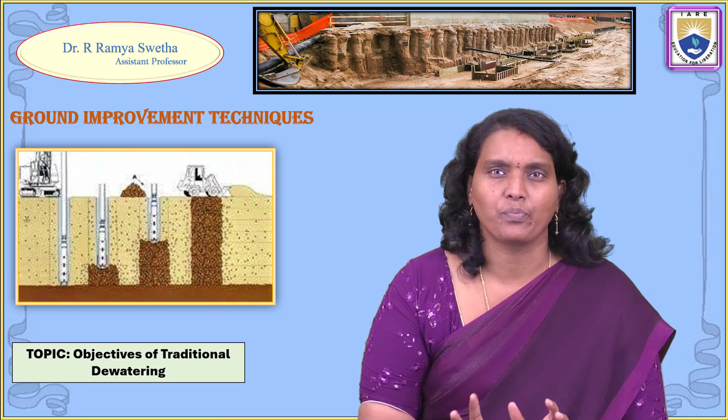Objectives of traditional dewatering. In this, we have to understand the various objectives involved in traditional dewatering. In dewatering, we stabilize excavation sites, improve soil bearing capacity, prevent flooding, facilitate construction, and carry out environmental remediation. These are the various objectives for dewatering.

Coming to stabilizing excavation sites: we remove the excess water to stabilize the soil and prevent cave-ins or collapse during excavation. Removing this excess water to stabilize the soil comes under stabilizing excavation sites. This is one of the objectives of dewatering.

And we all know how important soil bearing capacity is for any type of construction work we start. So before that, we have to understand the soil bearing capacity. Improving the soil bearing capacity means reducing the water content in soil to increase its load bearing capacity for foundations, for structures we construct below the ground level, and for other structures also. So improving soil bearing capacity is also one of the objectives of dewatering.

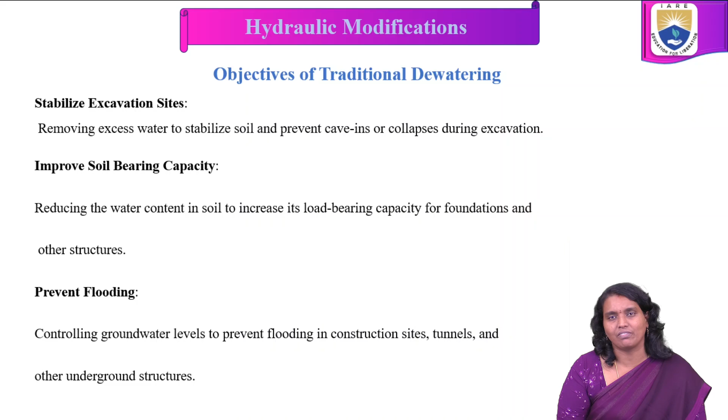It depends upon whether it is a tunnel or other underground structures. In some cases, flooding may need to be prevented above the structures also. It may involve low height bridges, and different scenarios may be considered. The main thing is we have to prevent flooding.

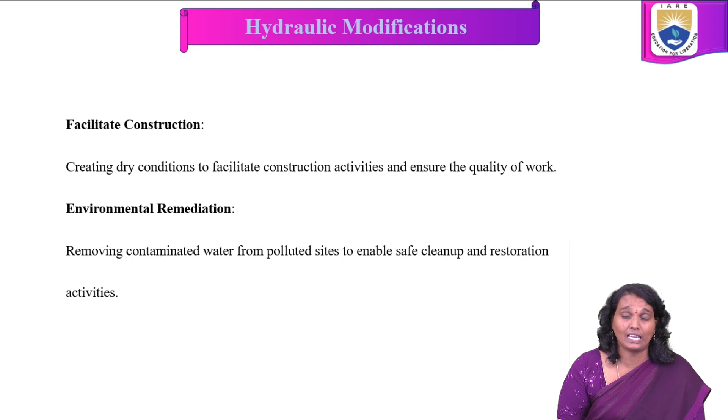The next one is facilitating construction. Here, activities are carried out under dry conditions to facilitate construction and ensure the quality of the work. And environmental remediation: removing contaminated water from polluted sites to enable safe cleanup and restoration activities. These are some of the objectives of dewatering.

Now, what are the various dewatering techniques? The first is sump pumping. In this method, we dig sumps or pits at the lowest points of the site and use pumps to remove water, such as reciprocating pumps. We remove the excess water in the sumps or pits from their lowest point using a pipe system. That is the sump pumping method.

Where do we use it, and what are the applications? If there are deep excavations, it is not adoptable. Sump pumping is suitable for shallow excavations and areas with low water table fluctuations. Whenever deep foundations are required, or the water level is very deep below ground level, sump pumping is not adaptable.

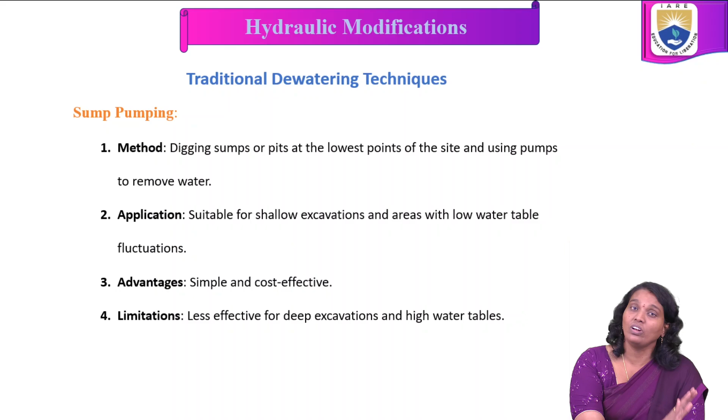Now, well point systems, another traditional dewatering system. In this, a series of small diameter wells is installed and connected to a header pipe and pump to lower the groundwater level.

In this application, it is also effective for shallow to moderate depths and sandy soils. In this, the soil condition also we have to understand. The well point system is suitable for sandy soils and it is effective for shallow to moderate depths. So the previous sump pumping is only for shallow. This is for shallow to moderate depths.

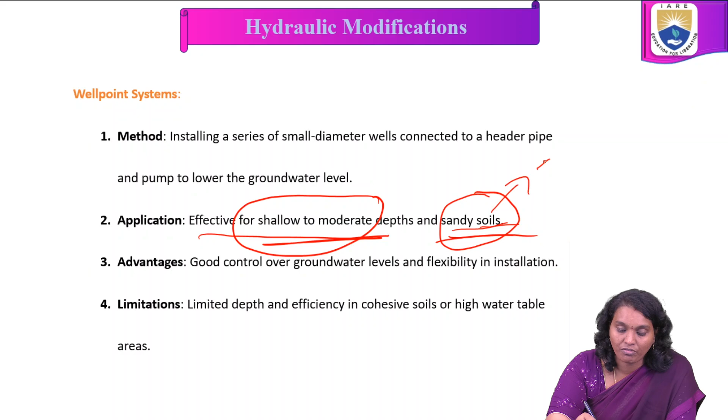It is also not suitable for deep depths, and the type of the soil is also important in these well point systems. Only in sandy soil conditions are we going to apply well point systems. Coming to the advantages, it gives good control over the groundwater levels and flexibility in installation. The installation process is very flexible in this well point system.

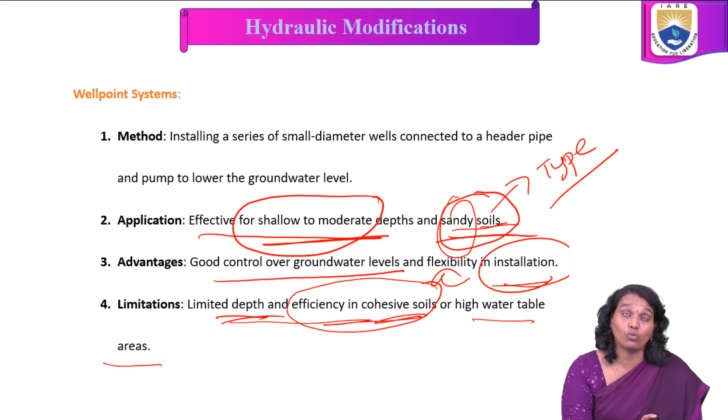And coming to the limitations, limited depth and efficiency in cohesive soils or high water table areas. So from the efficiency point of view in cohesive soils, it is limited, as well as in deep depths. It is not at all an adaptive traditional technique there. It is adaptive when effective for shallow to moderate depths and sandy soil conditions.

Next one is the deep wells. So drilling deep wells with submersible pumps to remove water from greater depths. In such cases we are using these deep wells. This is suitable for deep excavation and high groundwater levels. The advantage is it is effective for deep water table control and large volumes of water. Whenever large volumes of water are there and the depth is also more, in those scenarios we are using deep wells.

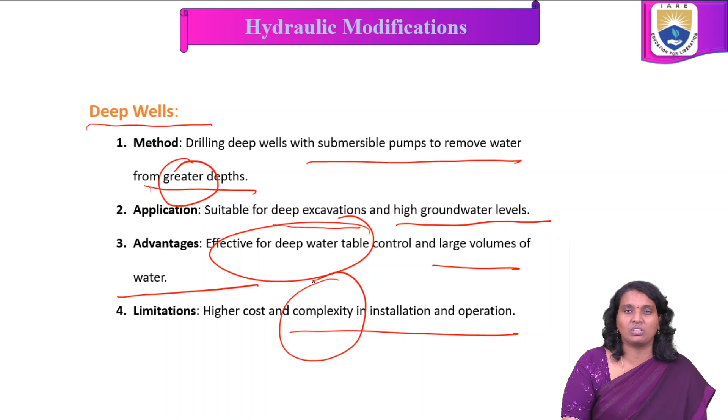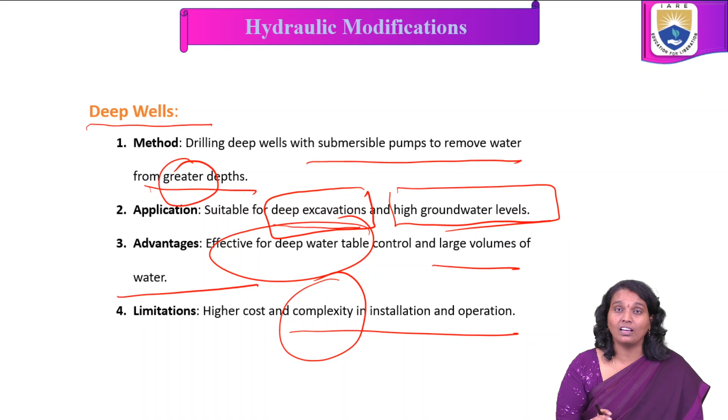Coming to the limitations, higher cost and complexity in installation and operation. It is very costly. It is also eligible and adaptive for shallow and moderate depths, but the cost is more. So whenever it is required, we have to adopt it, that is enough. And at the time of installation there is so much complexity, and also in its operation. So these are the deep wells, which are suitable for deep excavation and high groundwater level conditions, removing water from great depths.

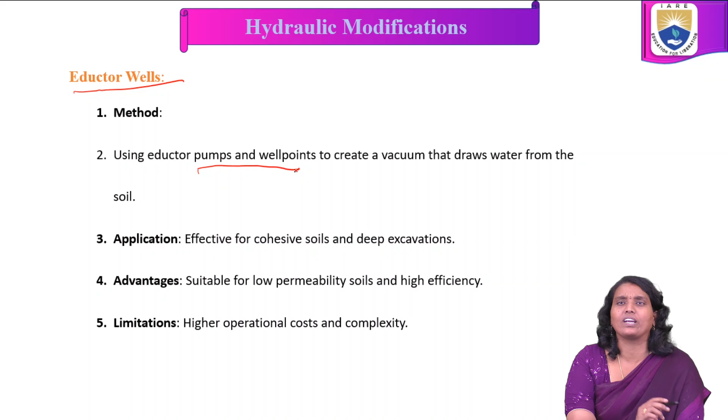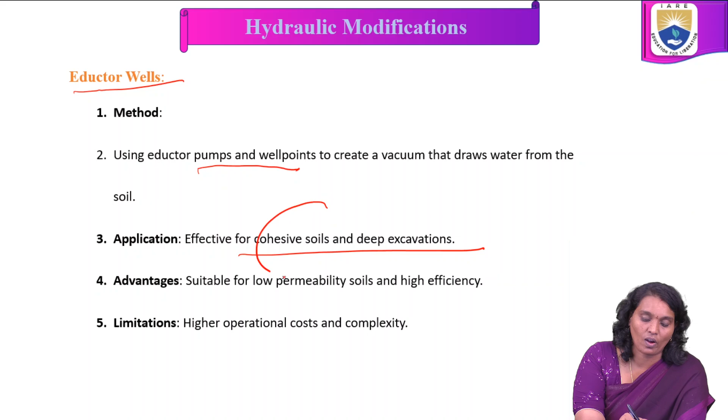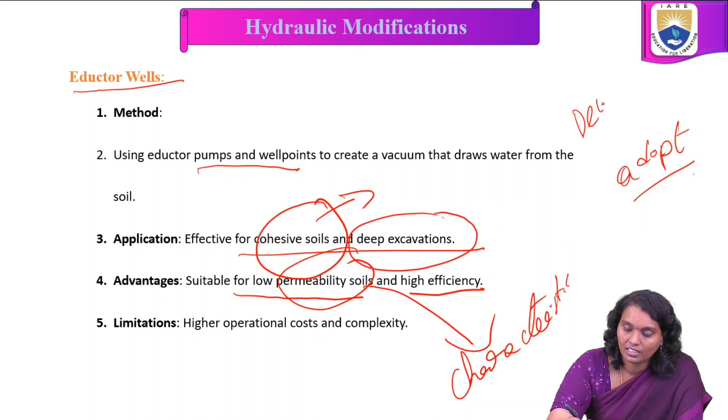And eductor wells: in this, using pumps and well points to create a vacuum that draws water from the soil. This is effective for cohesive soils as well as deep excavation. It is helpful for deep excavation and that too for cohesive soils. Cohesive soils are not suited for deep wells, but here it is adapted. It is suitable for low permeability soils and has high efficiency. Based on the characteristics, we adopt different kinds of traditional dewatering techniques. So this is for high efficiency as well as low permeability conditions.

Next one is the limitation, higher operational cost. It also costs more. The operational cost is very high and also complexity is there.

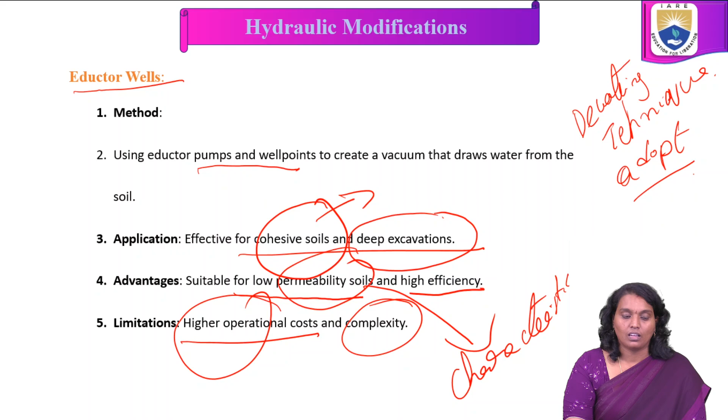Now move on to the drainage trenches. This is also one of the traditional dewatering techniques. It is excavating trenches filled with gravel or drainage pipes to collect and divert water away from the site. It is suitable for areas with surface water issues or shallow groundwater. It is simple and effective for surface water control. Whenever heavy rains are there in that particular locality, these kinds of drainage trenches are very helpful.

And coming to the limitations, it has limited depth control and effectiveness in high groundwater conditions. These are the parameters we are going to understand for this drainage trench method. It is applicable for surface areas, the advantage is it is effective for surface water control, and it has limited depth.

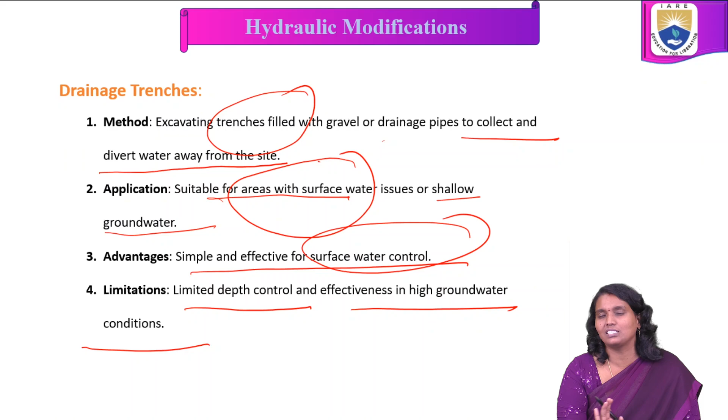Effectiveness in high groundwater conditions is difficult. The effectiveness is limited for these high groundwater conditions.

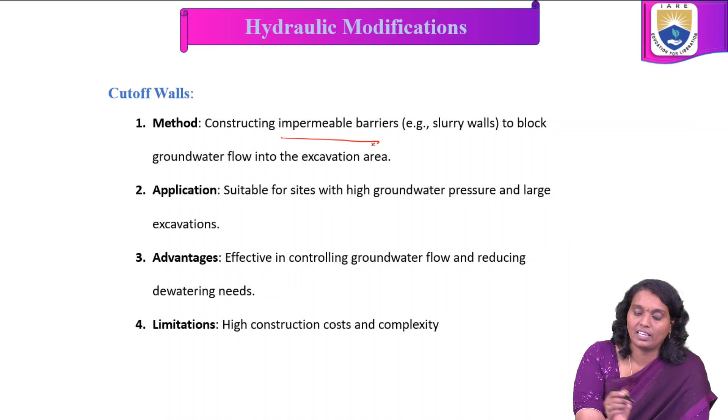The next one is cut-off walls. In this method, we construct impermeable barriers, for example slurry walls, to block groundwater flow into the excavation area. Such a type is nothing but cut-off walls. The excavated area is already there, so we are going to block it using cut-off walls.

It is suitable for sites with high groundwater pressure and large excavations. Where groundwater pressure is high and excavation is large, we may adopt these cut-off walls.

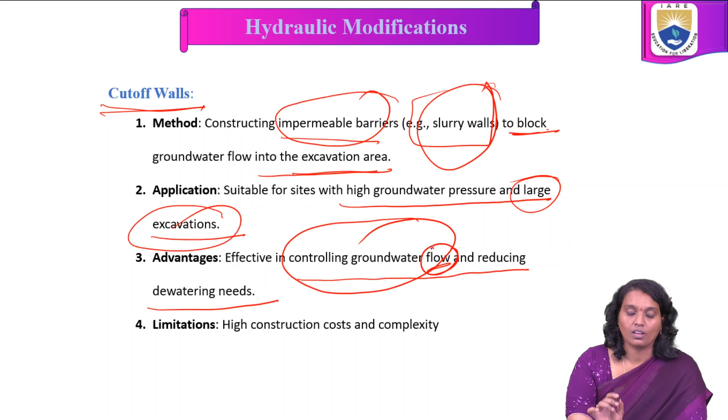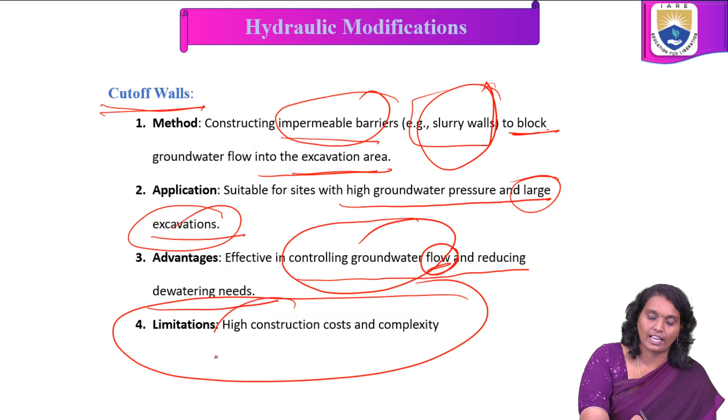Coming to the advantages, they are effective in controlling groundwater flow and reducing dewatering needs. The limitation of cut-off walls is high construction cost and complexity.

Now, choosing the right dewatering technique. Till now we understood the various traditional dewatering techniques, the various situations and their applicability. Now we are going to choose the right dewatering technique based on various parameters.

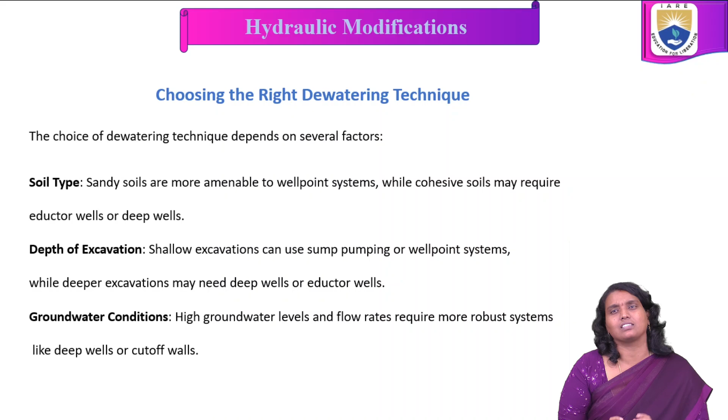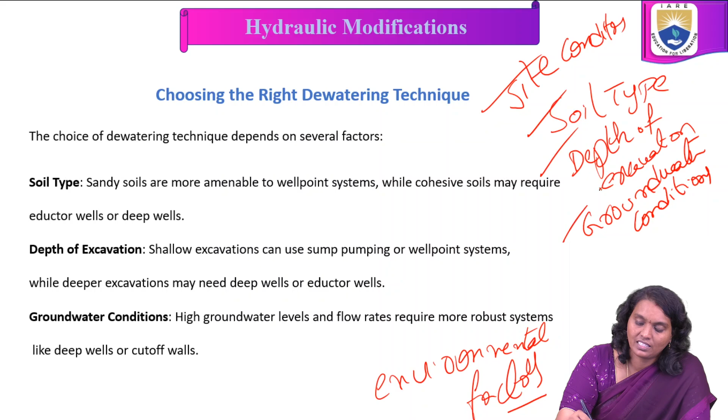These are soil type, depth of excavation, groundwater conditions, site conditions, and environmental parameters. Based on these we choose which type of dewatering technique is suitable for that particular scenario.

In soil type, sandy soils are more amenable to well point systems. Clayey soils are for deep wells or eductor wells. So for sandy soils we choose the well point system, and for clayey soils we choose deep wells.

Now coming to the depth of excavation. Shallow excavations can use sump pumping or well point systems, while deeper excavations may need deep wells. For shallow, sump pumping; shallow to moderate, well point systems; deeper, deep wells. So based on the factor, we choose the dewatering technique.

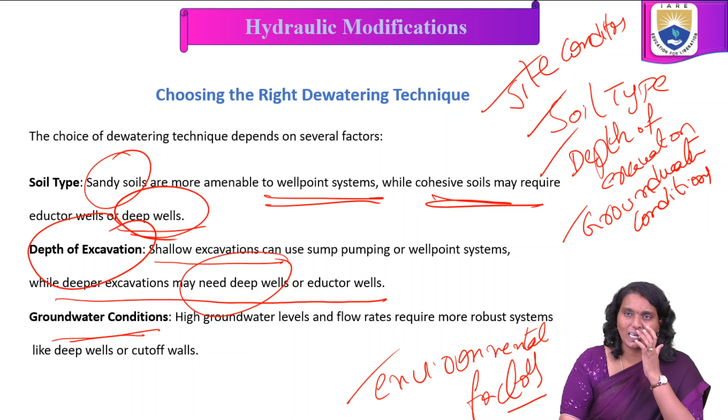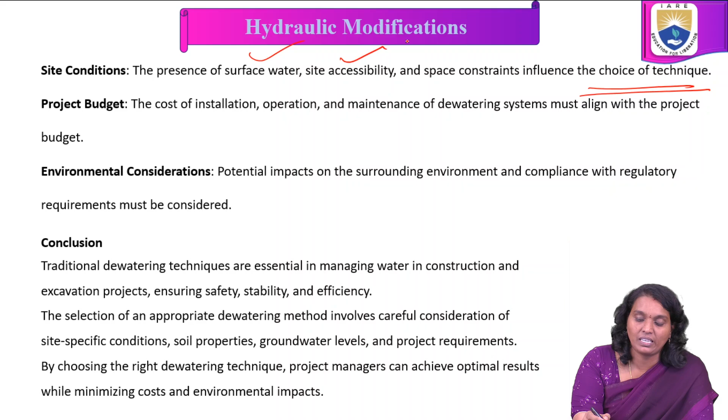Groundwater conditions: high groundwater levels and flow rates require more robust systems like deep wells or cut-off walls. Site conditions: the presence of surface water, site accessibility and space constraints influence the choice of technique. Also important is the project budget; the cost of installation, operation and maintenance must align with the project budget.

Environmental considerations: potential impacts on the surrounding environment and compliance with regulatory requirements must be considered.

Now let's conclude as a summary. We covered the objectives of dewatering, the different traditional methods, and how we choose those dewatering techniques based on various parameters, as well as which type is adaptable for a given condition.

Traditional dewatering techniques are essential for managing water in construction and excavation projects, ensuring safety, stability and efficiency. Selecting an appropriate method involves careful consideration of site-specific conditions, soil properties, groundwater levels, and project requirements. By choosing the right technique, project managers can achieve optimal results while minimizing cost and environmental impact.